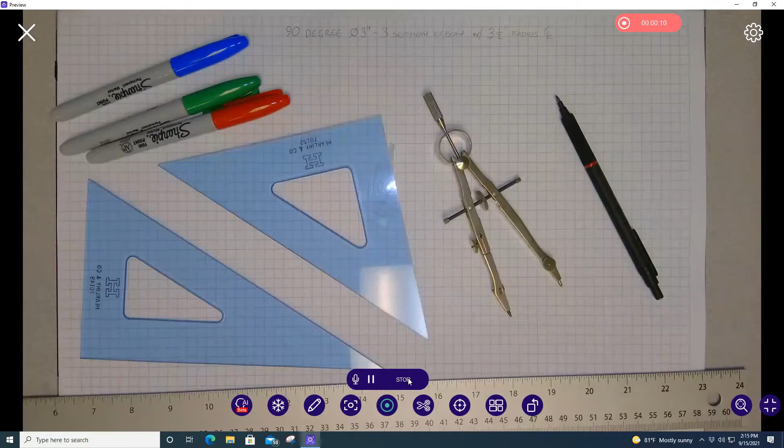Okay, so we're going to do an example of a 90-degree, 3-inch diameter, 3-section elbow with a 3.5-inch centerline radius, and a 1.5-inch radius.

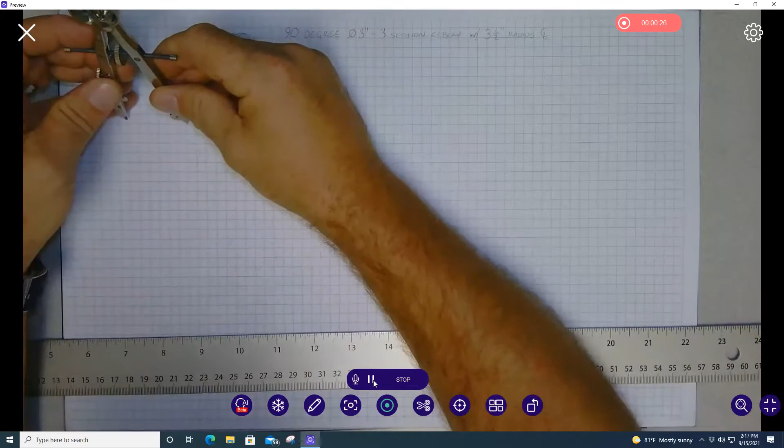I'm going to use some basic geometric construction techniques to divide my circle up. We're using grid paper, it helps us a little bit, and a T-square. So I've got my 12 o'clock, my 6 o'clock, my 3 and my 9 o'clock. Then I'm going to use the same radius to get very close to breaking this up into 12. This is going to be a very close estimate of the 12 section division of a circle. Okay, right there.

Now I'm going to draw these points down straight.

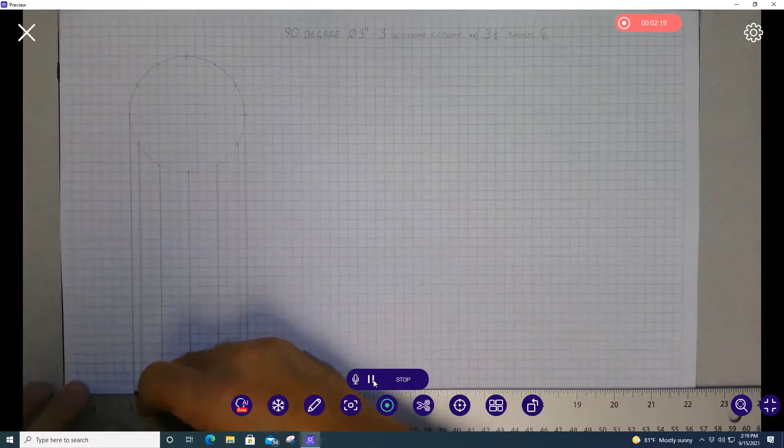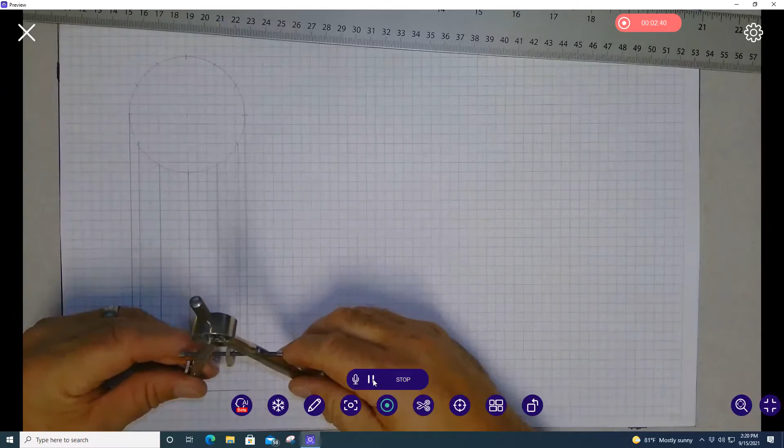I'm going to draw the bottom of my elbow right here. Now I'm going to set my radius to 3.5, so 3.5 for the center line. Do the outside of my elbow - it's about as far as my compass can reach. And the inside.

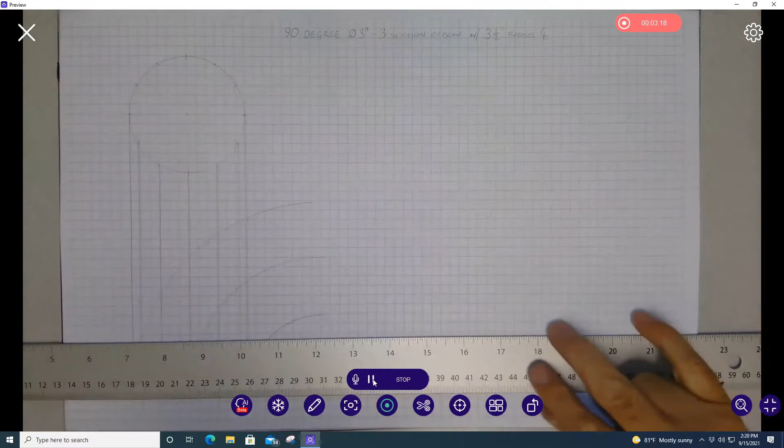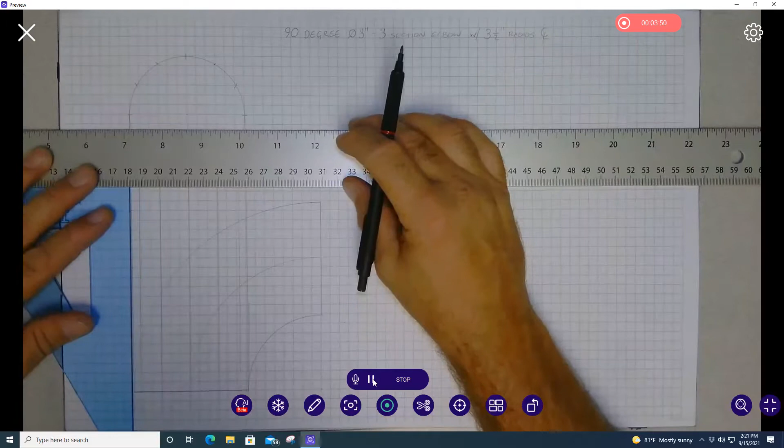Let me just cheat here a little bit. There we go. Alright, so we're going to make this a 3-section. So I'm going to come straight up here, and straight up here with my construction lines. Then I'm going to come straight out here, and here. And then I'm going to use a 45-degree triangle.

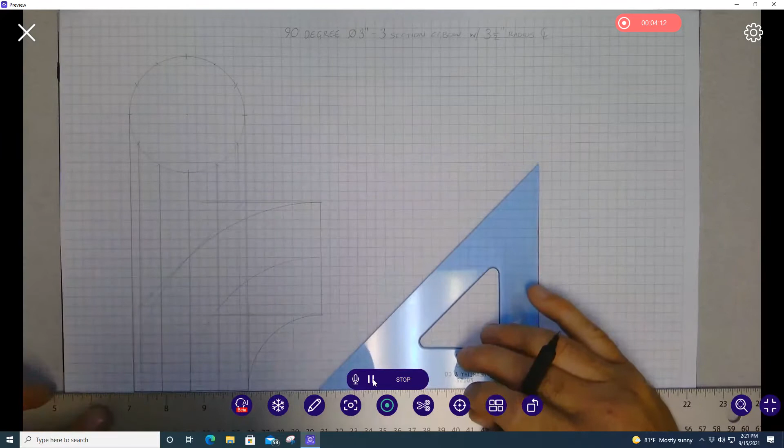Find the tangent point on my curve. Draw there, and then the same here, the tangent point on the curve, to here, and then these will join from here to here, and here to here. I'm going to pause for a moment and darken that up.

Okay, now I'm going to use a red point here and a red point here, a green point and a green point, and let's do a blue right here.

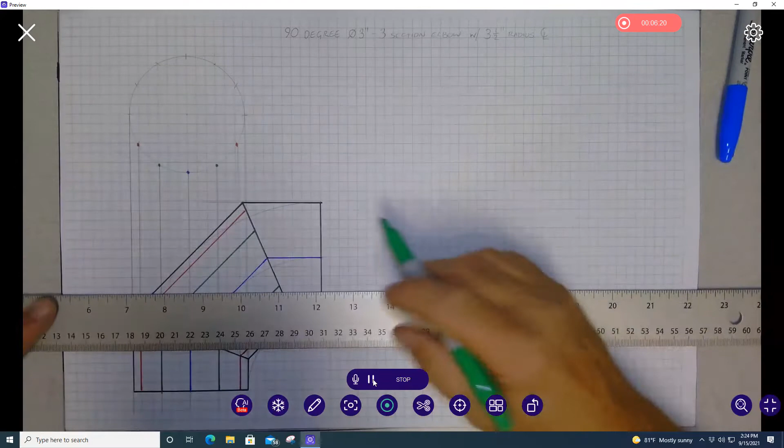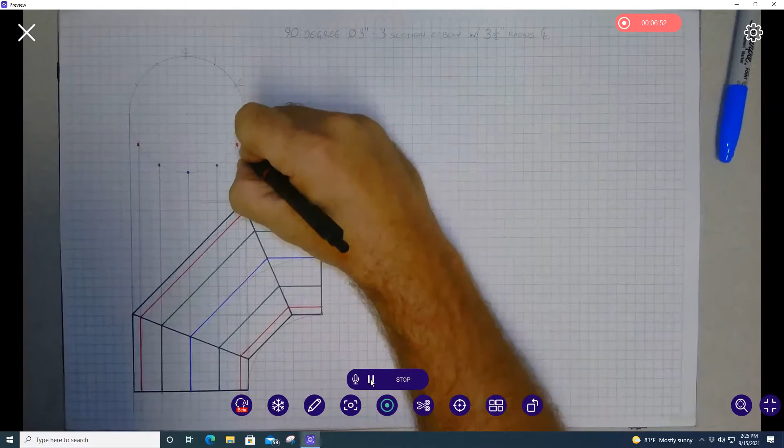I'm also going to number these, just like a clock. So we're going to go 12, 1, 2, 3, 4, 5, 6, 7, 8, 9, 10, 11, and back to 12.

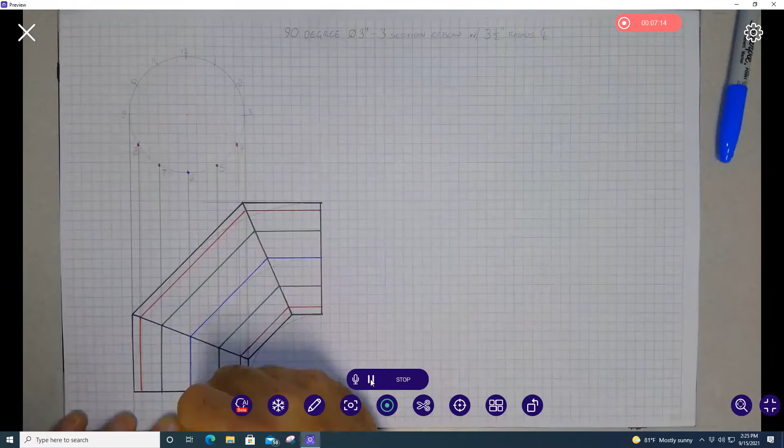So if I follow these lines down, this will be 12 and 6. This will be 1 and 5. This will be 2 and 4. This will be 11 and 7. This will be 10 and 8. And then, of course, this will be 9 o'clock.

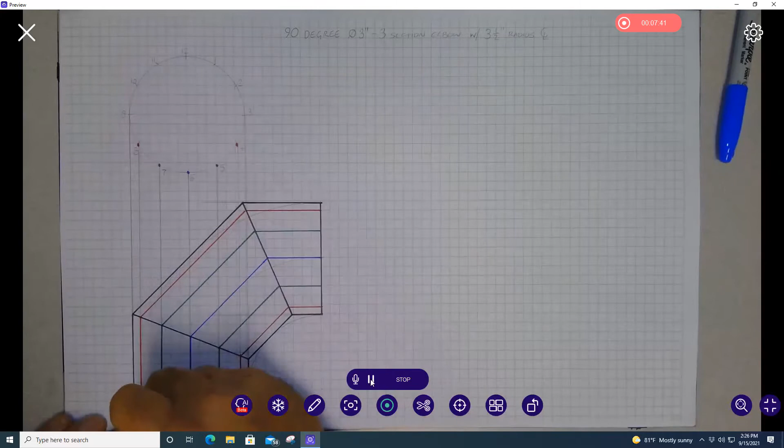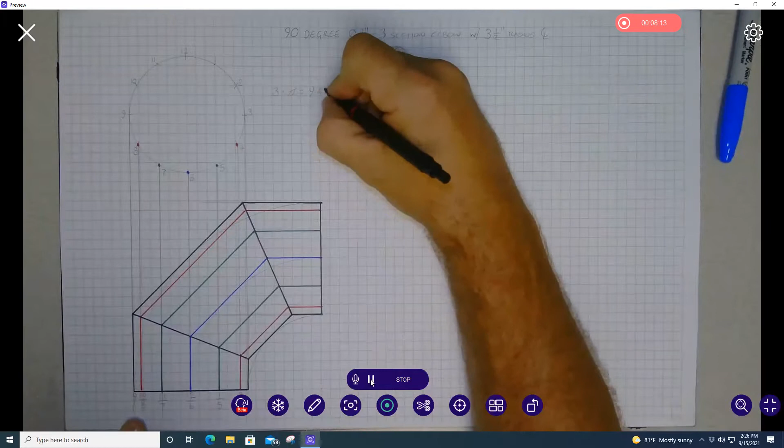Now, this has a diameter of 3. So in order to get the circumference, which will be our flat layout or stretch out, we would do 3 multiplied by pi, which I believe is going to give us about 9.43. Let me double check that. Yep, so we're pretty close, 9.42, 9.43, depending on how you round.

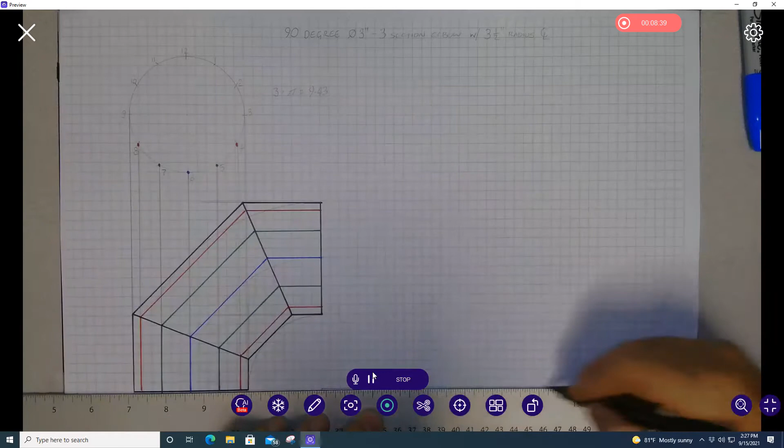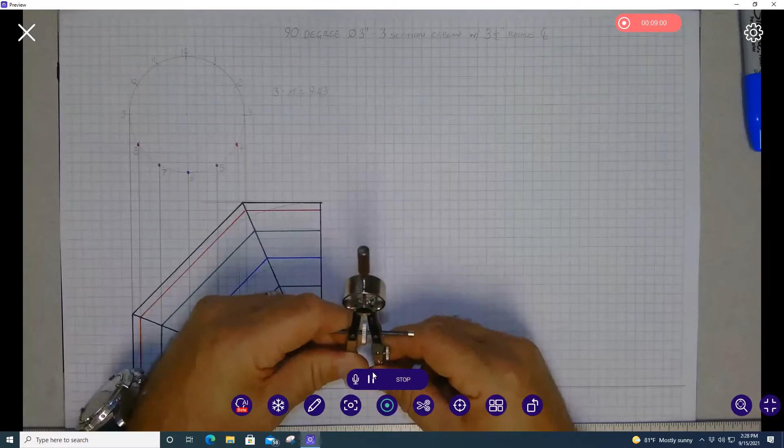So this would be this pattern laid out flat. If we were going to do it in CAD, we would probably use this exact value. What I'm going to do for this instance is get it close - I'm just going to draw a line along here, and measure in between these points. Remember, the more of these divisions that you do, the higher the resolution on this elbow will be, so the smoother it will be. We're just starting with a simple 12 division. So here is division 1, 2, 3, 4, 5, 6, 7, 8, 9, 10, 11, and 12.

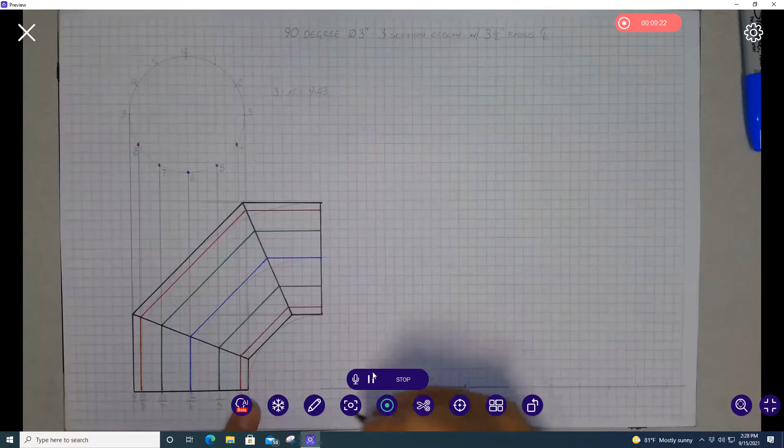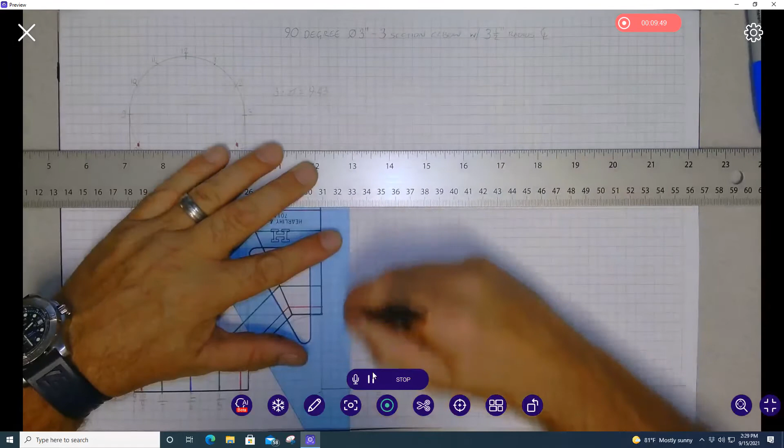Now I'm actually going to start with 3. So this is going to be 3, 4, 5, 6, 7, 8, 9, 10, 11, 12, 1, 2, and back to 3 right there. I'm going to go ahead and draw some vertical lines at each one of these. Remember, draw these lines lightly because we're just creating construction lines at this point.

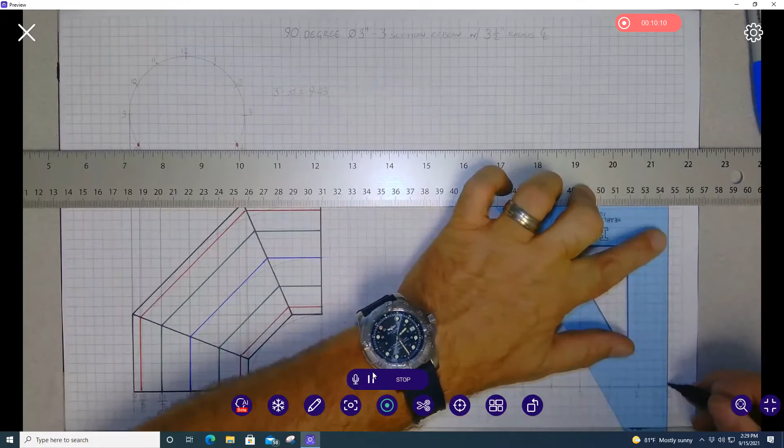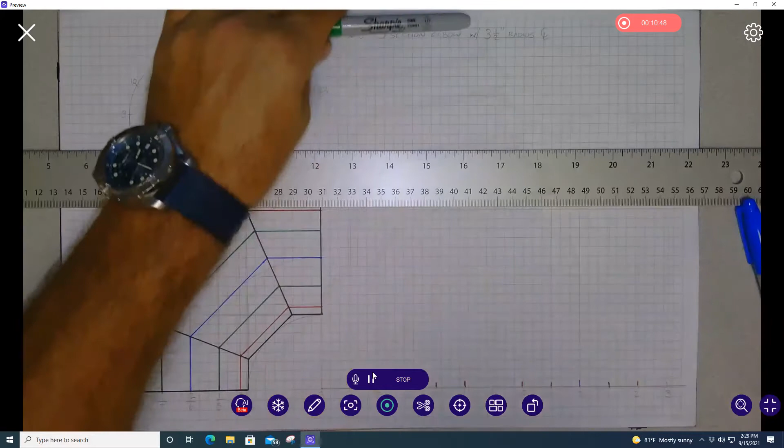And then, of course, as well as the numbers, I've chosen to use colors. So 12 and 6 are going to be blue - there's a blue and a blue. 2 and 4 are going to be red, and also 10 and 8. Then 11 and 7 are going to be green, 11 and 7, and also 1 and 5. And then 3 and 9 are going to be black - there's black. Just a couple of different ways to keep up with it.

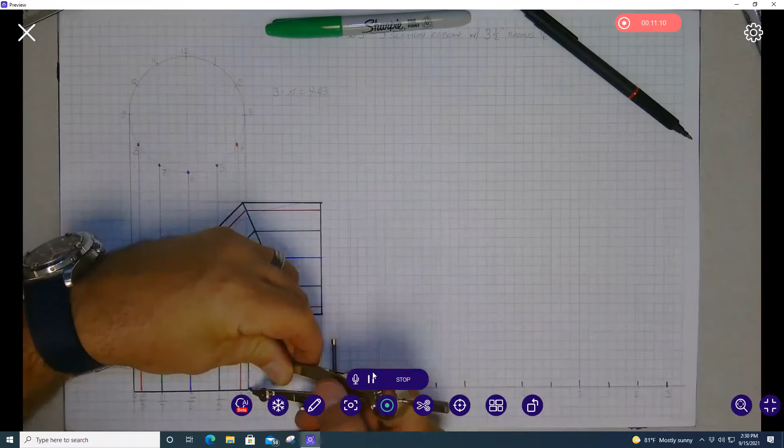Now, 3, which is here, we brought it down from here. This is the height of 3. We can measure the height of that with our compass. Then we can transfer it right here. Then we can go to 4, measure the height of 4 with our compass, and mark that height right here, so on and so forth.

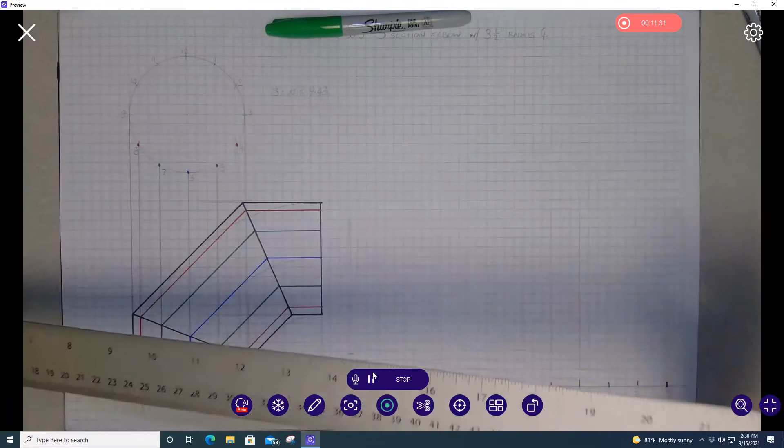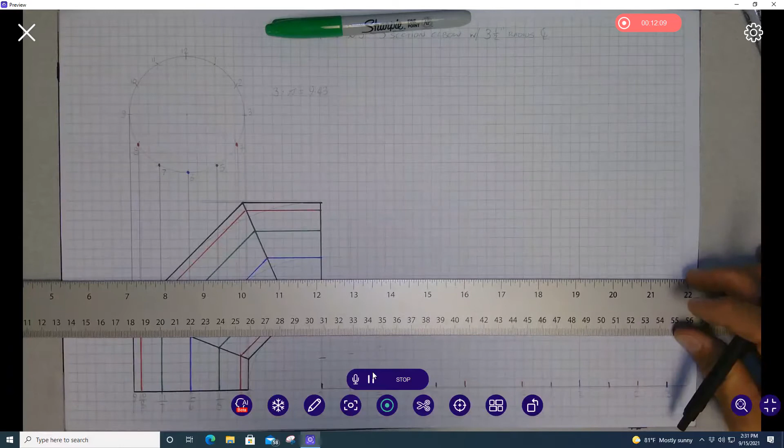What I'm going to do is just use my T-square, since I've got a straight edge here. And of course there is 4, there is 3, and here's 5, here's 6, 7, 8, 9, and then of course we start coming back down, right? 10, 11, 12, 1, 2, and 3.

So the parallel line for 3 is right here, and it is going to be black. And we've also got 9 that's going to be black, so I'm going to go ahead and fill that in just so we can see it a little better.

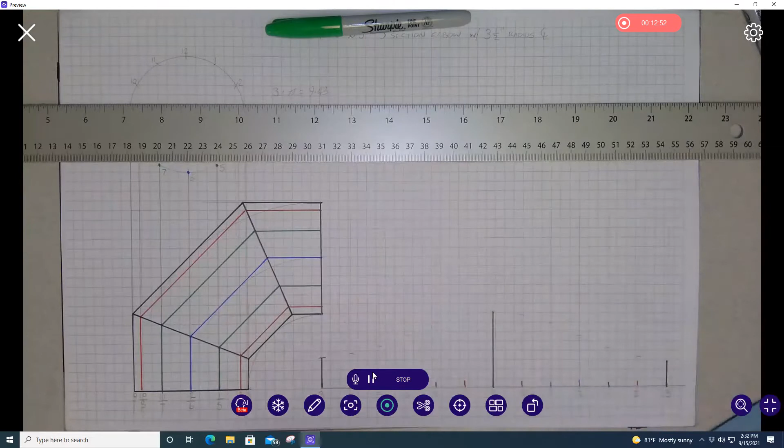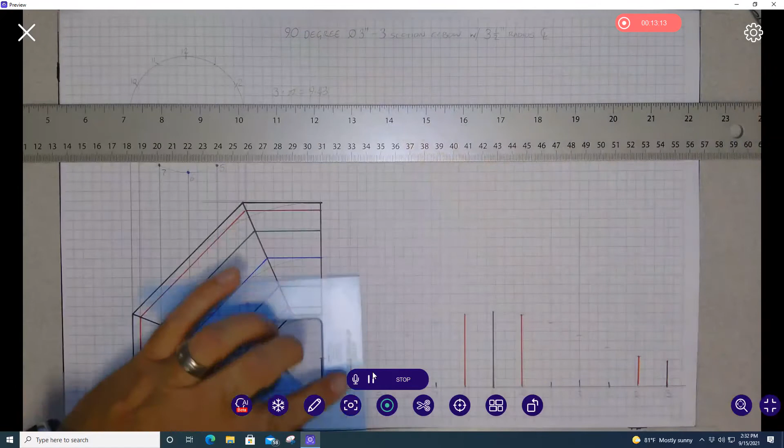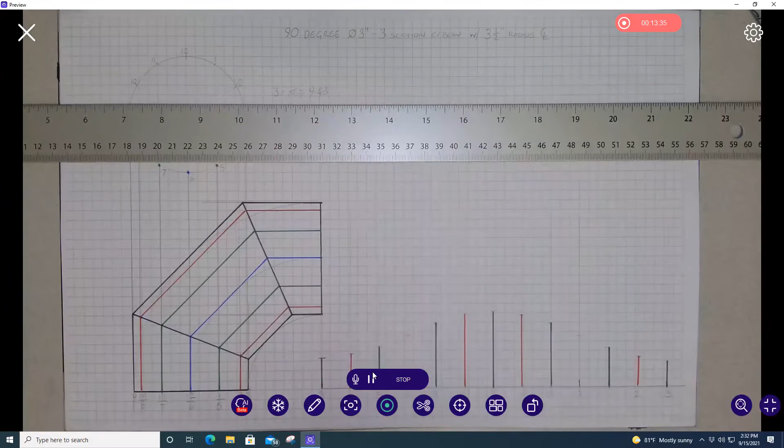And I'm going to do my reds. So 4 is going to be red, 8 is going to be red, 10 is red, 2 is red. Greens, 5 is a green, and again these colors are just to help you visualize while you're learning this. And we have our blue.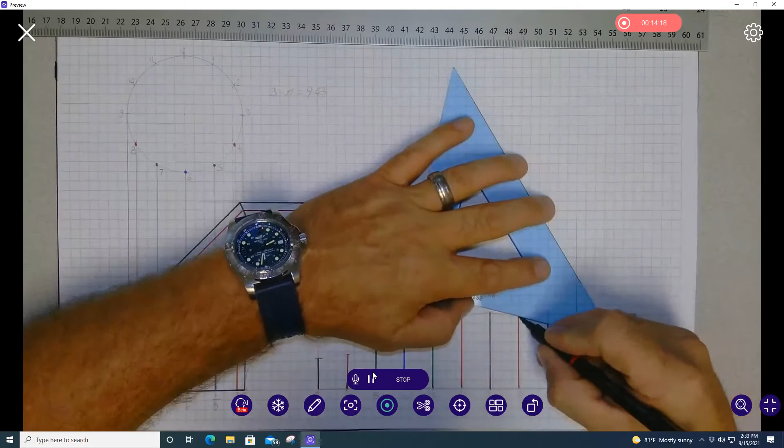And there's that little wave shape of our first development. So this layout right here will actually cover us for this portion and this portion.

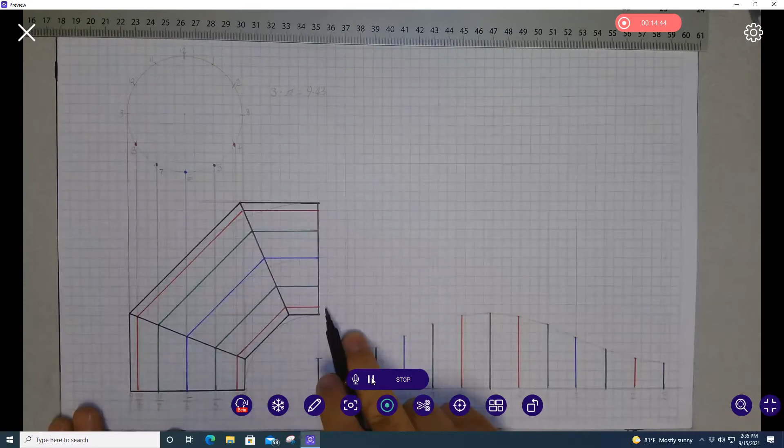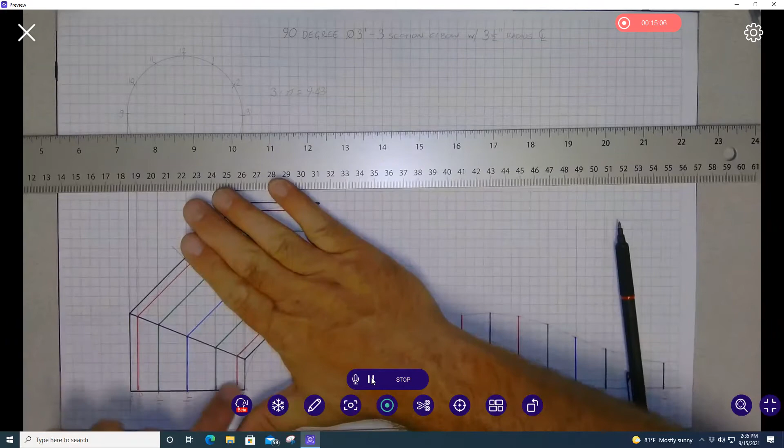Next, what we want to do is get this center section. So I'm actually going to divide this into 2, make it a little easier. I've already marked the midpoints, so I'm going to put a center line through this, divide it into 2, and you'll notice basically what you've got is another one of these. It's kind of the same thing that's going to be mirrored. But we'll go ahead and draw one anyway.

I'm going to draw it up high here, so let's start here. Just draw a line again. I'm going to do the same divisions, so I'm going to set this on my same divisions that I had earlier.

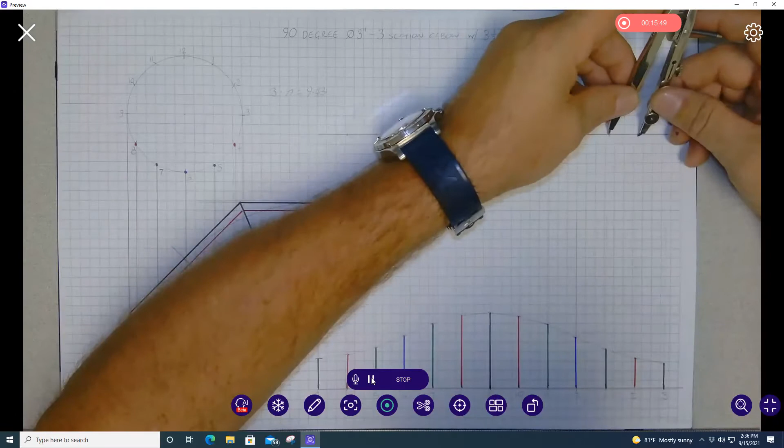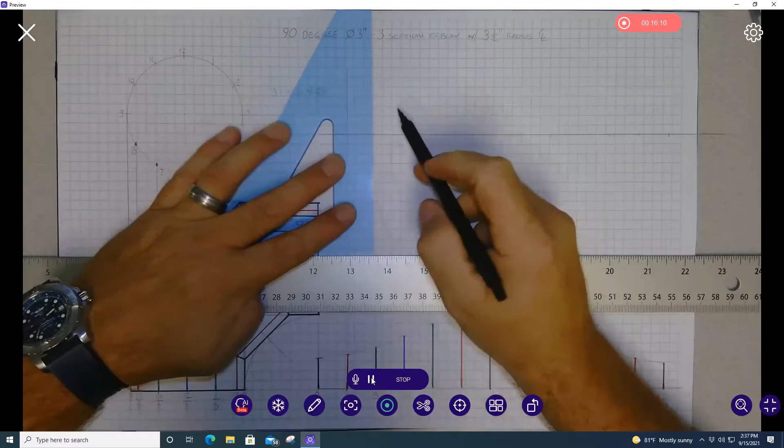And of course I'm using grid paper, so I'll be able to use these lines to kind of help me keep stuff straight, and my T-square and such. I could go down here right now and go ahead and throw in some guidelines just to help us.

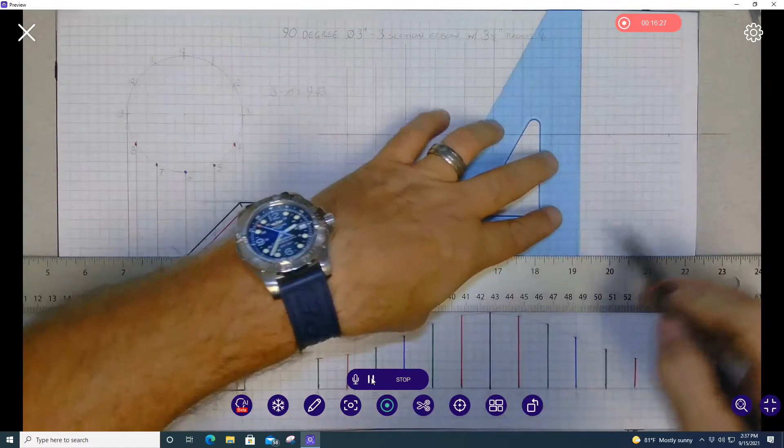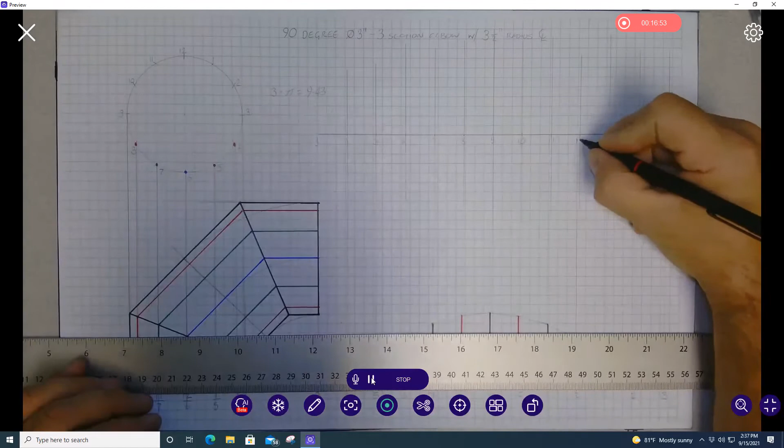I guess we could start with the same number. I missed this, but we're going to call this 3, 4, 5, 6, 7, 8, 9, 10, 11, 12, 1, 2, and back to 3.

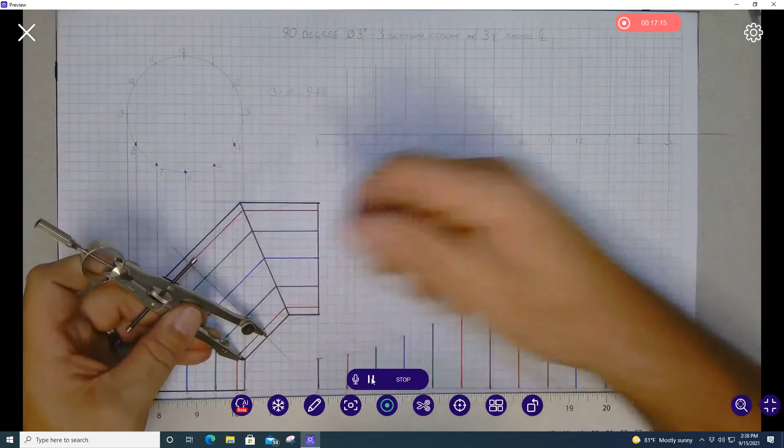So now, going to line 3 right here, and I'm going to measure from the center line out. So right there should be the same on both sides, right? I'm going to 3, I'm going to mark there, and I'm going to mark there. So my first line is going to actually be a black line, number 3, from there to there.

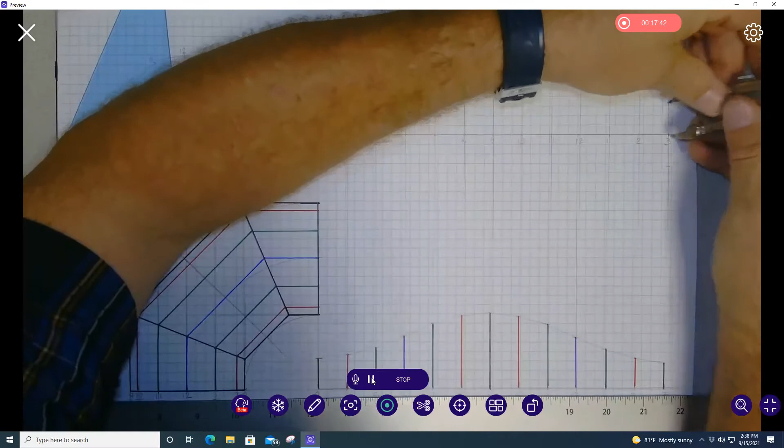And then we can do the same on the opposite side, because we know that's 3 also. Right there, and right there. So we're going both sides of this center line on this one.

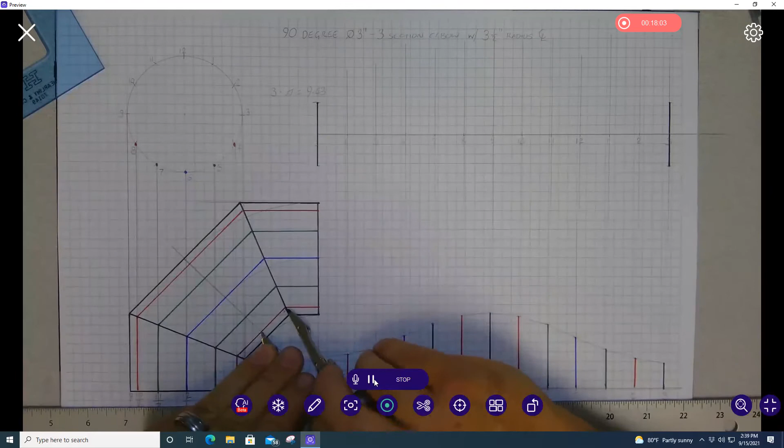Now we're going to go to line 2 and 4. We'll measure this with the compass, trying to be as accurate as possible. So there's 4. We're going to mark there and there. We're also going to mark 2, there and there.

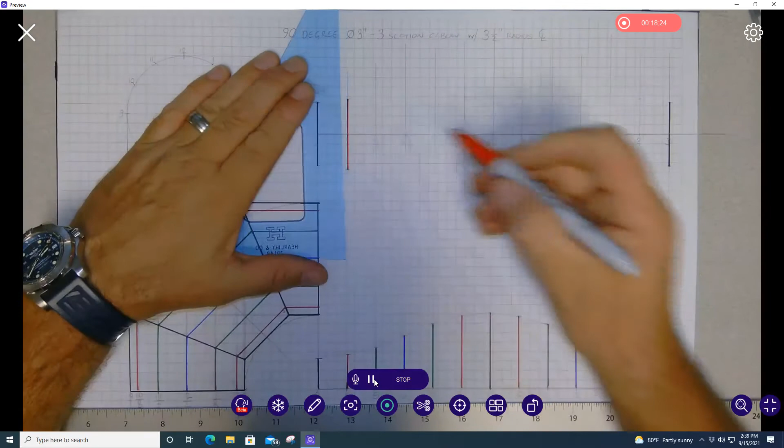And of course we did this one in red, so I'm going to go ahead and color it while we go in this case. Red.

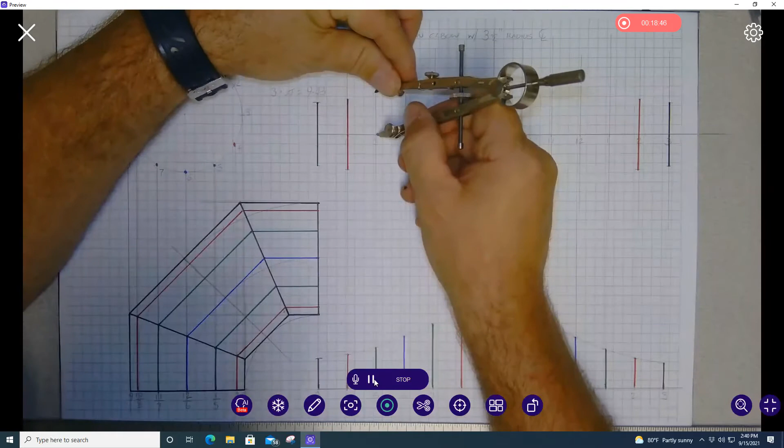Measure my green. So green is going to be 1 and 5, right? So there's 5, both sides. Then 1. And we'll go ahead and put the green lines in on that.

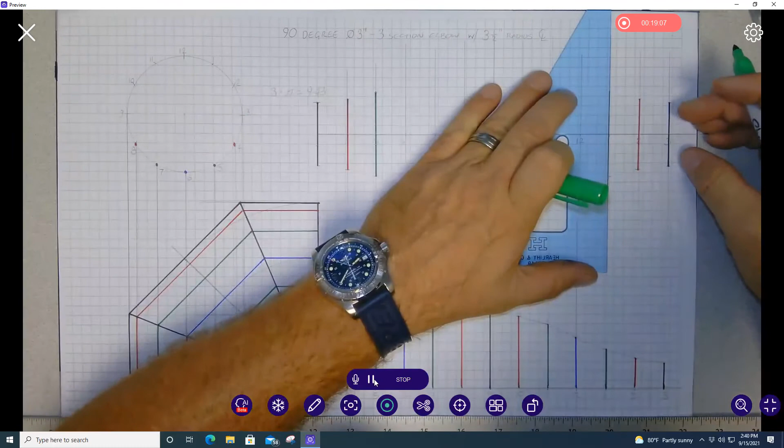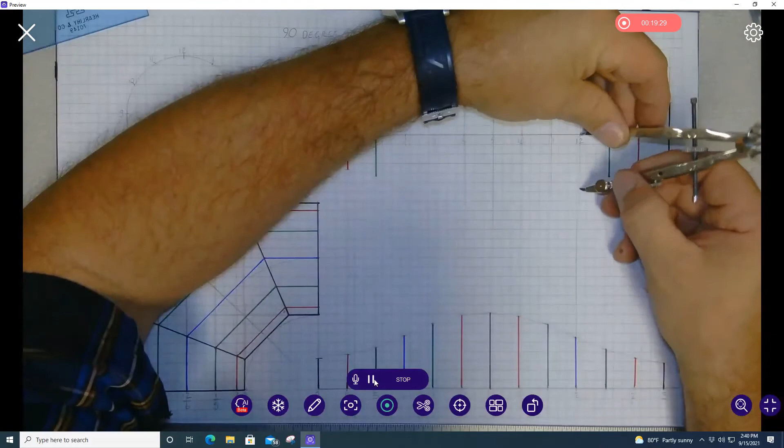Then we're going 6, 6 and 12. Measure this distance. And this line is going to be blue, right?

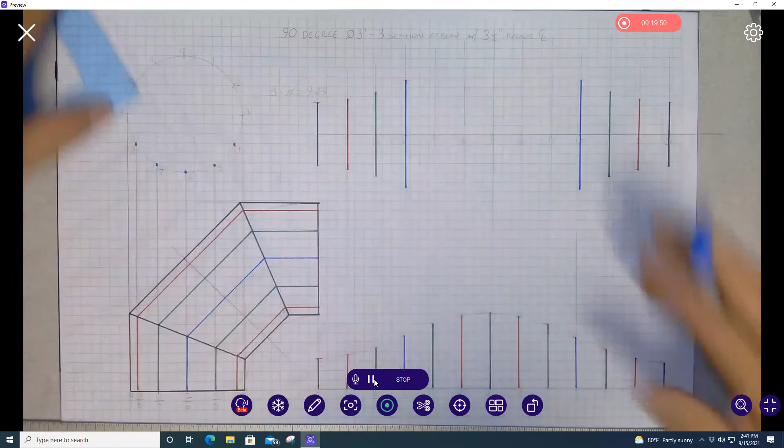So now we're going to do 11 and 7, which is right here. Measure our distance from the center again right here. 7, right there, and then 11, right there and right there. And we went back to black on this one.

Go ahead and color that one in. Again, you guys don't have to color these in. This is just to make it where you can see it a little bit easier to understand.

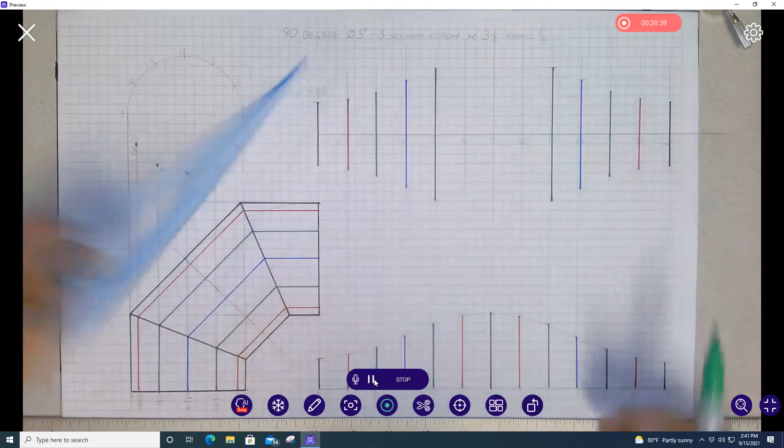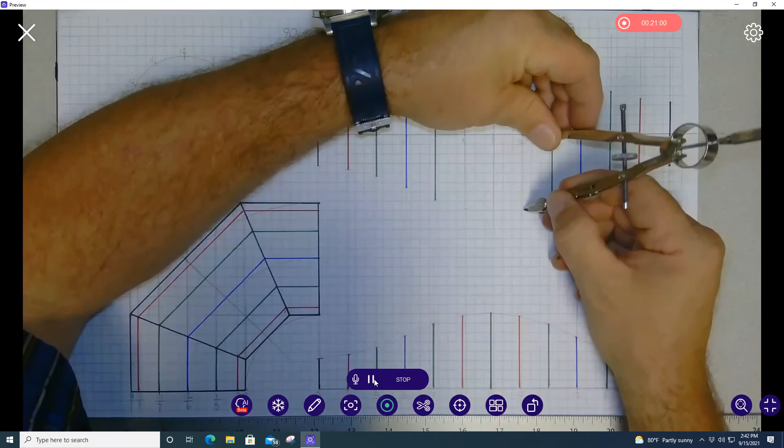Go to 10 and 8. Looks good. So 8 and 10, 8 and 10. And on this one we went to red.

Then finally we have our number 9 line, which is right here. And we used black for that.

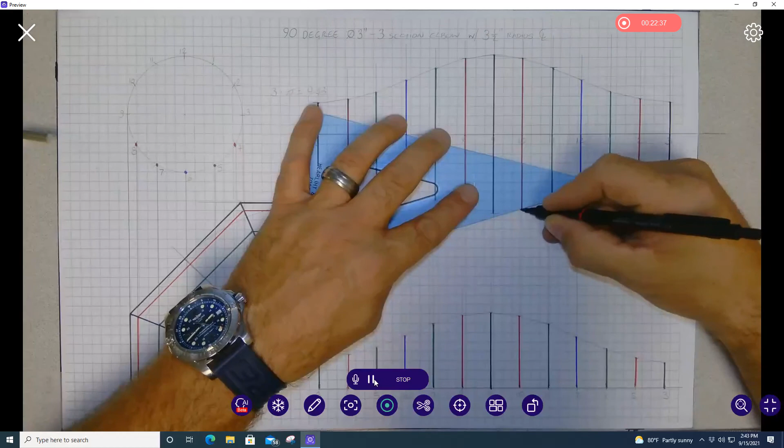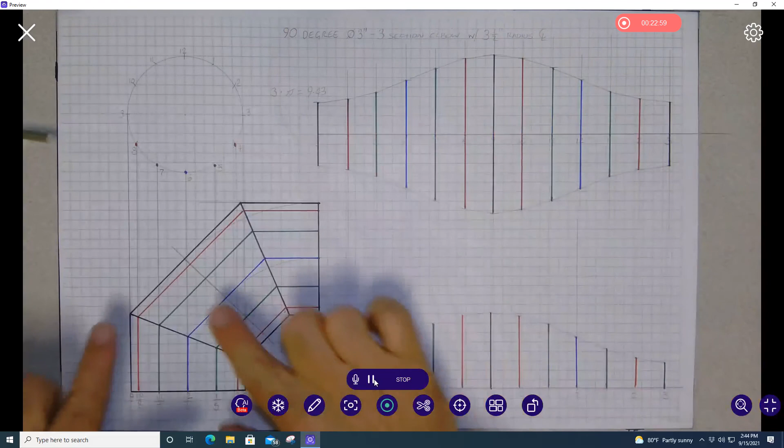And there you have it. So this section will roll into this section of your 3-section, 90-degree, 3-inch diameter elbow with a 3.5-inch radius center line.